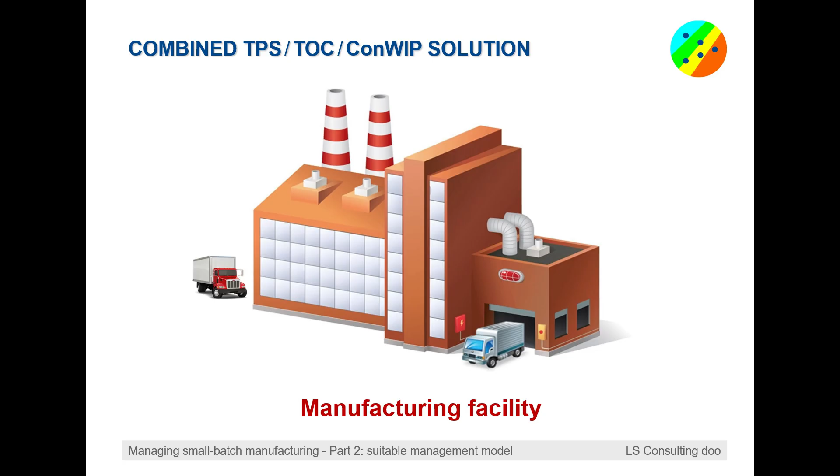Summarizing the previous video presentations in this series on managing small batch manufacturing, let me highlight a couple of the most important points. First of all, production management is not planning, or more precisely, not only planning.

It is a set of interrelated business processes, including organization, planning, dispatching, and performance monitoring, assuming reliable feedback and appropriate early warning indicators. As for the organization, the logistic structure of the system is not given to us from above.

We create it ourselves. It can be an A-type plant or V-type plant, or some other simpler or more complicated logistics. And if someone claims that his management tools do not depend on the system's structure, or that the main problem is to develop the best production schedule but everything else is not his business, then this should rather be considered bad news.

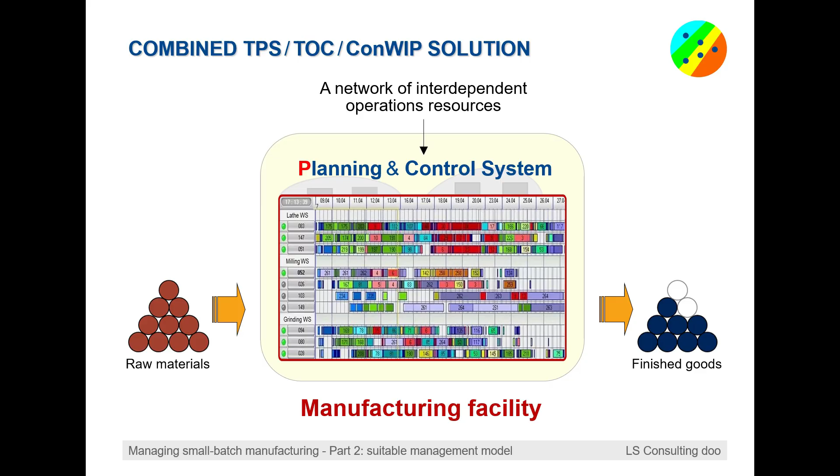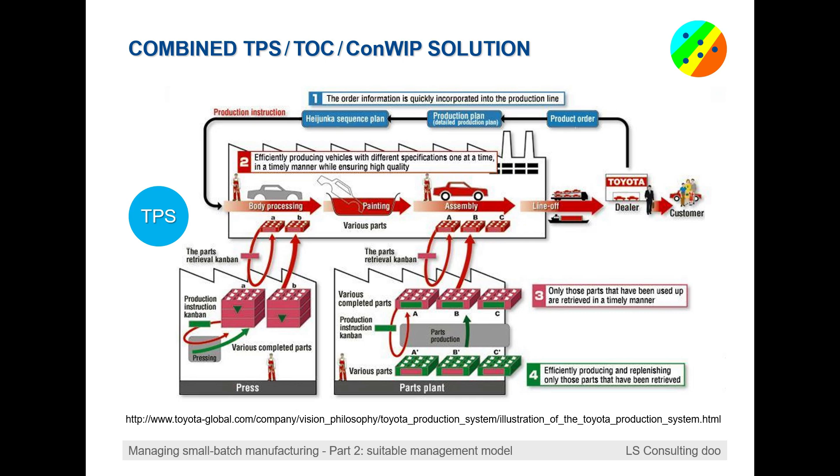The second point is that production planning does not necessarily mean operations detailed scheduling. For instance, there is no such planning in the Toyota production system. In particular, they don't set up in advance the start and completion dates for each individual operation. To distinguish the TPS planning mode, I will call this sequencing instead of scheduling.

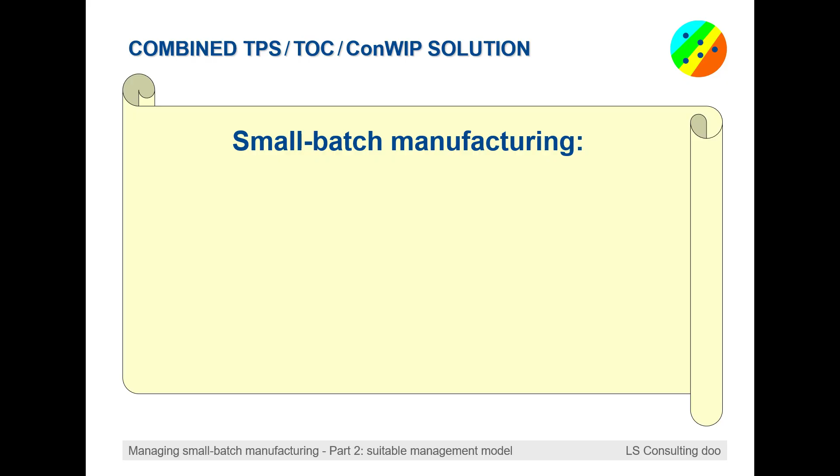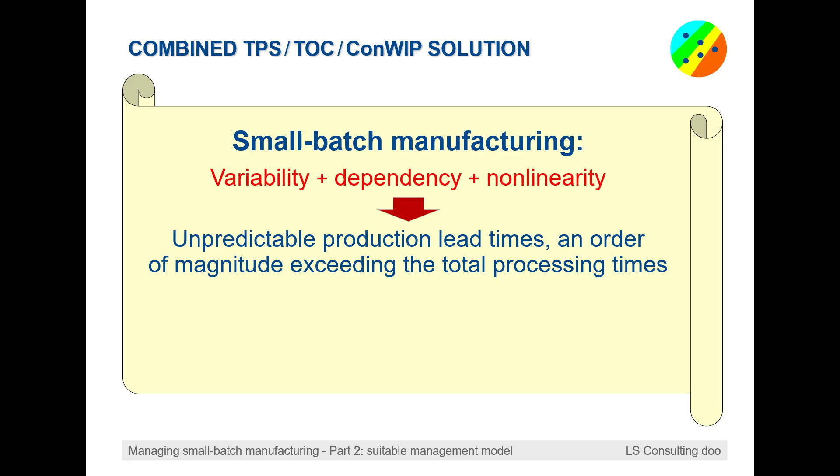The third point is that in small batch manufacturing, due to its characteristic high variability, strong dependency, and non-linearity, the execution times become unpredictable, an order of magnitude exceeding the corresponding total processing times. Therefore, a Taylor-type management model based on operations detailed scheduling is not applicable, not to mention the suboptimality and structural instability of the resulting mathematical solutions.

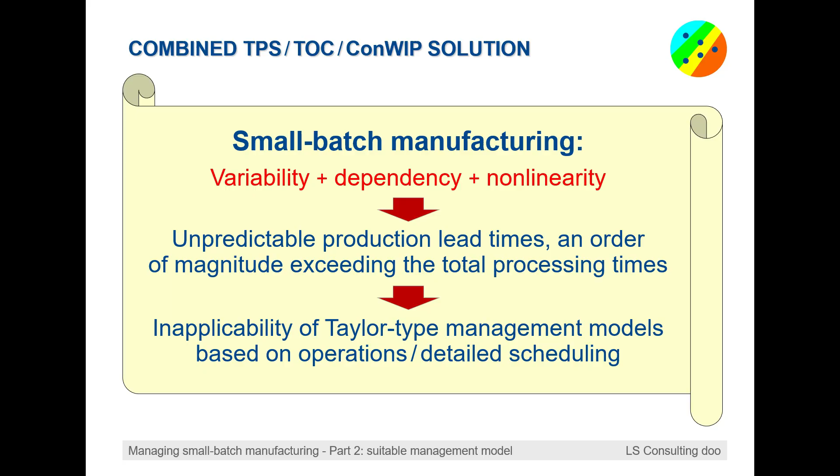On the other hand, in order for any system to be manageable, the following necessary conditions must be met: a single command post providing coordinated control actions, and the magnitude of the control actions themselves must exceed the internal noise level. If, for example, variations in production lead times are measured in days, planning in hours doesn't make sense then.

An explicit stabilization mechanism should be implemented. Otherwise, you will never know whether the change in the production state is due to your control actions or just because of the system's instability.

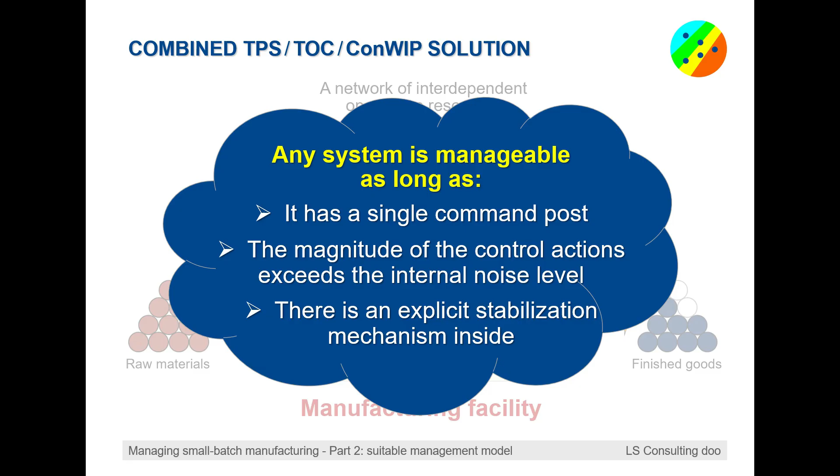Finally, it was proposed to develop a new management model, an alternative to the Taylor-type one, suitable for a small batch operating environment, and based on appropriately modified key logistics components of the Toyota production system. Within this Toyota-type management model, operations detailed scheduling should be replaced by sequence planning, taking uncertainty buffering into account.

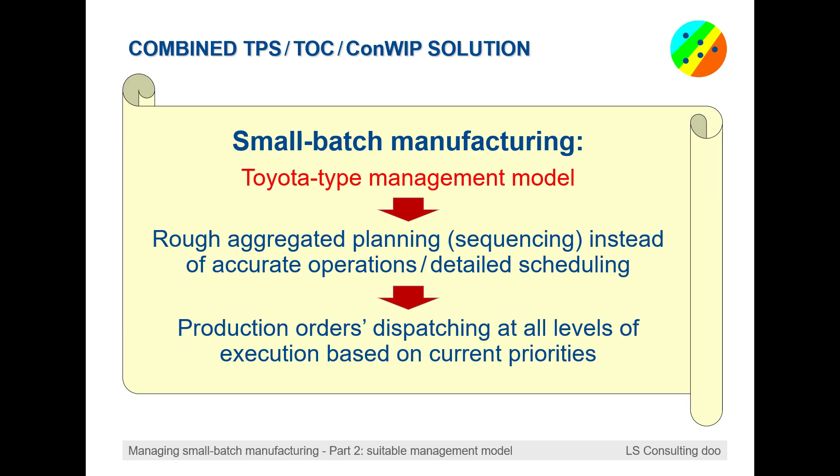And the emphasis in execution should be shifted from trying to follow preliminary created detailed time schedules to dispatching work in process based on current time-varying priorities. Without going into technical details, I will briefly describe now how these 5 key TPS components can be adapted for small batch manufacturing with an A-type or similar logistics structure.

As for the pacemaker process, the situation looks pretty simple. In Toyota, this is the main or assembly line, where the last processing step is performed. Obviously, if you need a single command post to control all production, the best choice would definitely be the step through which all material flows pass.

Therefore, the appointment of an assembly as a pacemaker process will be quite reasonable for any A-type plant, where the parts manufacturing and assembly production units are separated by a kitting point. Note that in the theory of constraints, such an element is sometimes referred to as a strategic constraint of the entire system.

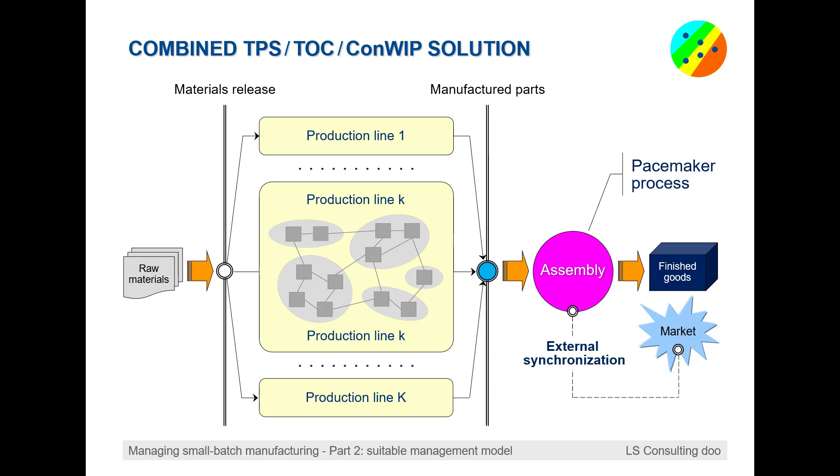This approach should ensure, on the one hand, the consistency of the master production schedule with the sales or finished goods shipment plan, the so-called external synchronization, and on the other hand, smoothing out the manifestations of the bullwhip effect and overloading of the capacity-constrained resources in the assembly feeding channels, the so-called internal synchronization.

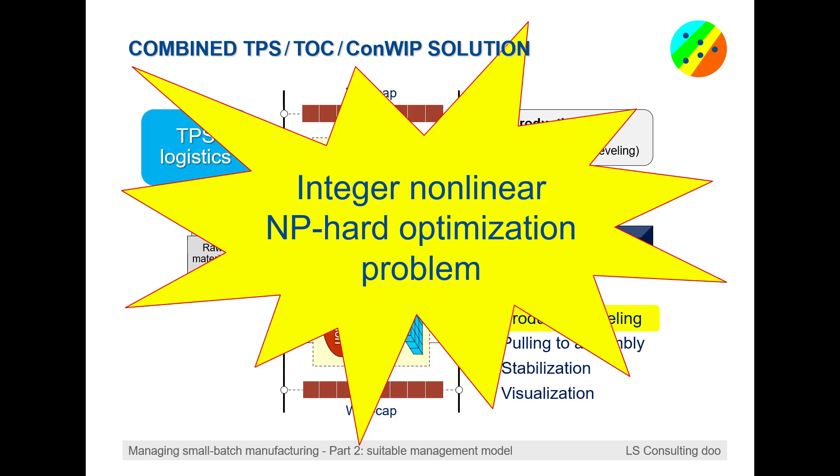To this end, for the mixed model cases, the only detailed instruction sheet is developed in Toyota on a daily basis, in the form of a sequence of car models introduced into the main line, the so-called Heijunka sequence and leveling plan, calculated in accordance with a quite sophisticated algorithm, as mentioned in one of the previous video presentations of this series. An integer, nonlinear NP-hard optimization problem is solved in Toyota for this purpose.

Whereas the corresponding technique that is believed to be the TPS cornerstone is proprietary and is considered a black box. In our situation, depending on the logistic structure of the system, as well as the completeness and reliability of the initial data, similar approaches can be used to level production.

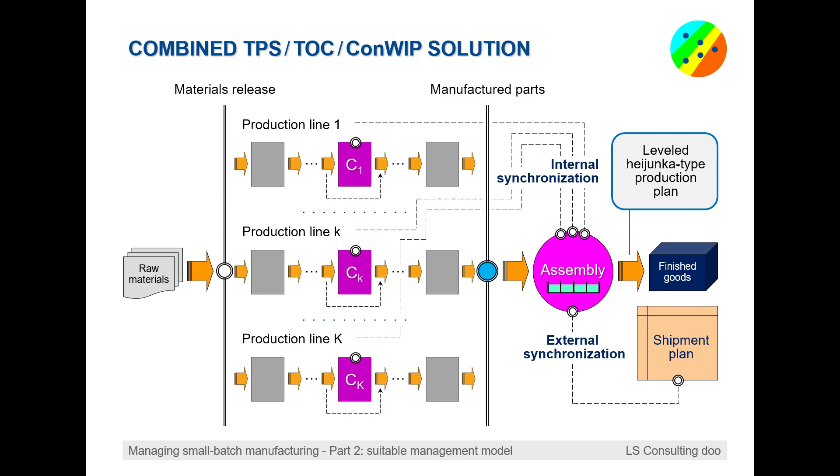In general, this requires additional built-in buffer protection in each of the feeding channels. But in some particular cases, due to the specially developed flow synchronization tools, it is quite possible to significantly reduce the size of such buffers, and consequently the production lead time.

For example, in this simple but real case with 4 end products and a given shipment plan, Heijunka type leveling can be performed according to the shown master production schedule, obtained by determining some mixture of items to be manufactured in each of the 12 sequential time intervals.

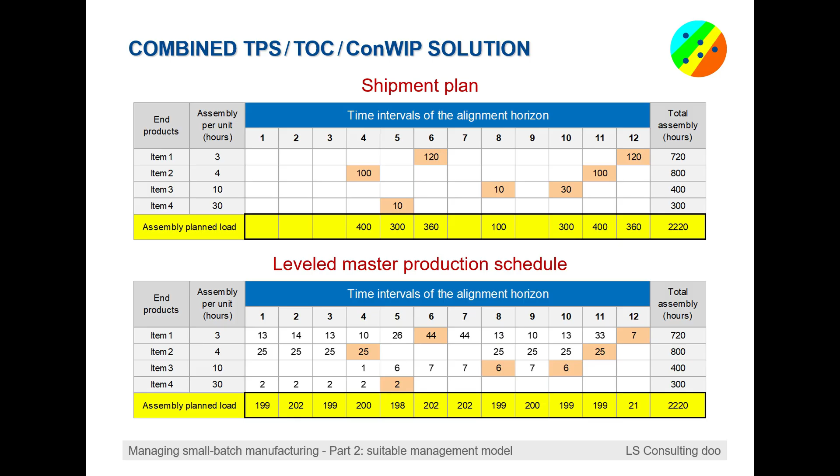Unlike Toyota, where only one assembly unit is released during takt time, a mixed aggregated plan is formed for small batch production. As for the pulling technique, the priorities of replenishing the mainline posts with the necessary components in Toyota are determined by the dynamics of their actual more or less even consumption.

Production lead times are usually short, and the first-come, first-served policy is quite effective. So the classic Kanban is perfect for such a production environment.

In small batch manufacturing, however, consumption rates can vary significantly over time, even if you produce some parts to stock. Therefore, it would be wise to be able to change the release and processing sequences accordingly.

An appropriate technique developed within the theory of constraints, called MTA, was briefly described in the previous video presentation of this series. It is very similar to Kanban, but is more flexible in a highly uncertain operating environment. In particular, the priority of each formed replenishment production order changes dynamically in time depending on the current manufacturing state.

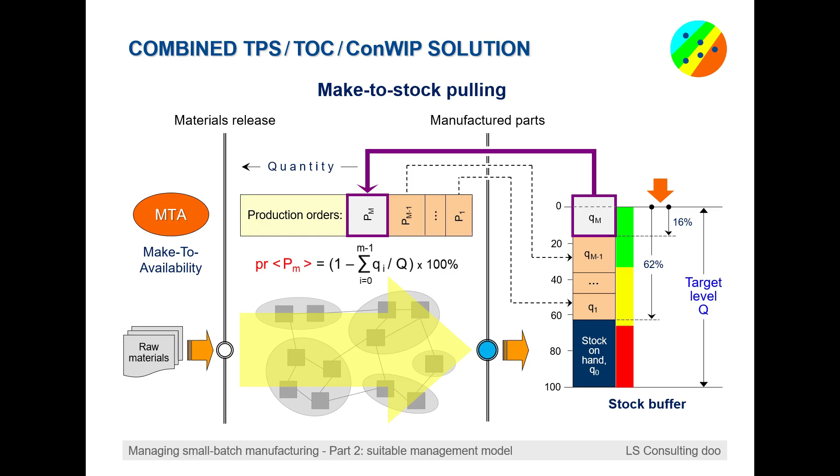Another important feature of small batch operating environment is the wide range of products, where many, if not all, finished goods are made according to customer orders. This usually means shipping as well as manufacturing the relevant parts and components to specified due dates and in certain quantities.

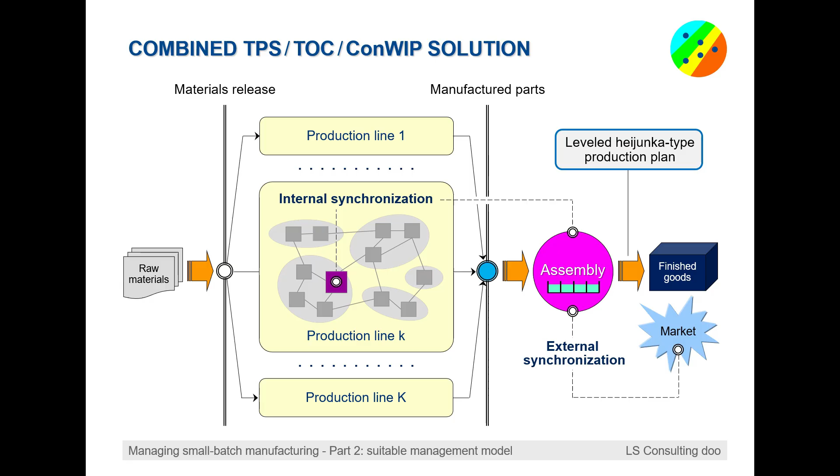The general idea of the corresponding SDBR logistics solution, developed within the theory of constraints, was also briefly described in the previous video presentation of this series.

To explain this mechanism in more detail, let's assume that 3 different parts need to be manufactured by some assembly start date, instead of senseless manipulations with the standard operation times.

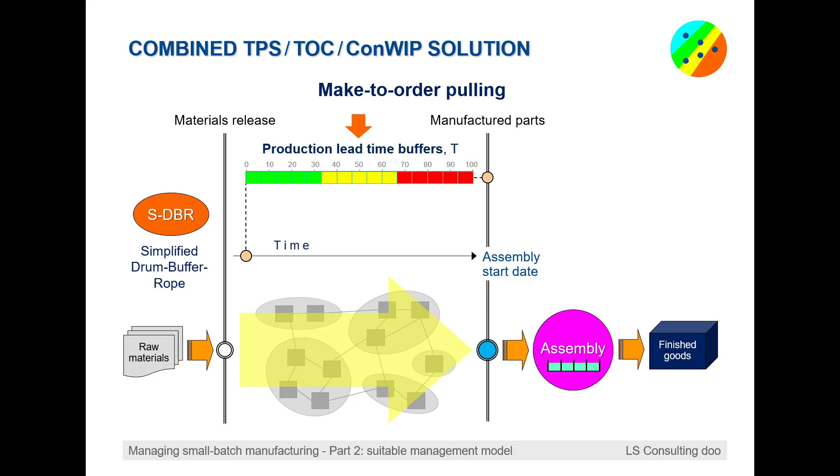A so-called production lead time buffer is introduced for each part, that is, a time interval sufficient for this part to pass through all manufacturing steps with a stably loaded system. As a result of such rough planning, preliminary start dates for the execution of the relevant production orders are determined.

And as part of this solution, the priority of each production order at any given time is calculated as the degree of penetration into the corresponding time buffer.

For example, in the diagram shown at the current date, the priority of the third production order is 50%, yellow zone. The second is 67%, on the border of the yellow and red zones, and the first is 80%, red zone.

Some may claim that it is very difficult to set time buffers for hundreds and thousands of parts, subassemblies, and assembly units in production.

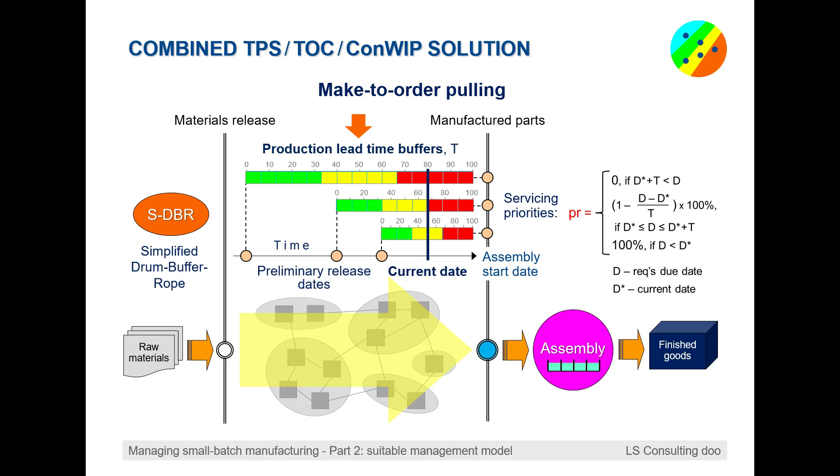I note once again that in the variations world we are not talking about precise numbers, and if the actual variability is measured in days, there is no point in planning anything in hours, let alone minutes. In addition, there are fairly simple practical approaches for assigning time buffers. Anyway, the stability of the production system is much more important.

As is well known from factory physics fundamentals, a prerequisite for the stable operation of any production system is that releases are regulated in a manner preventing work in process from growing beyond a specified limit, or WIP cap.

In TPS, this is done in the simplest way by fixing the number of Kanbans at each processing step. In our situation, when Kanban is not applied, the necessary explicit mechanism can control the work in process level in each production line, or in groups of lines, or in the entire system at once.

In such a case, thanks to the principle of an optimal operating mode existence, briefly described in one of the previous video presentations of this series, it becomes possible to fully control manufacturing and to make the system really pull.

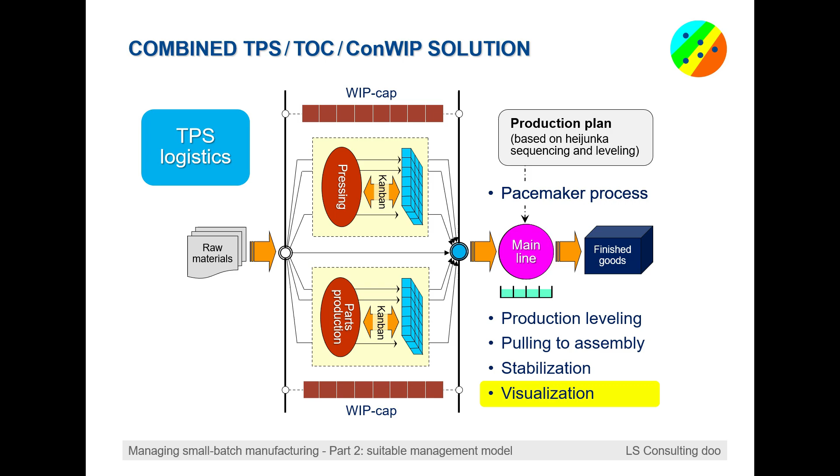The last but not least TPS key component is visualization. In this regard, in Toyota they usually talk about Kanban cards, Heijunka boxes, and all kinds of shop floor dashboards.

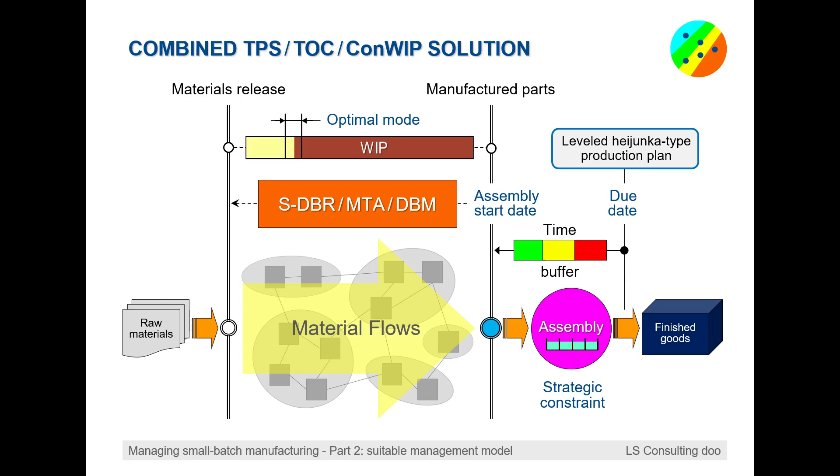Meanwhile, in a high uncertainty operating environment, typical for small batch manufacturing, such a function is of particular importance, especially when the emphasis shifts from detailed planning to dispatching. We badly need a special tool that allows us to identify troubles foreseen in the future, sort of the terrain awareness and warning system in modern aviation.

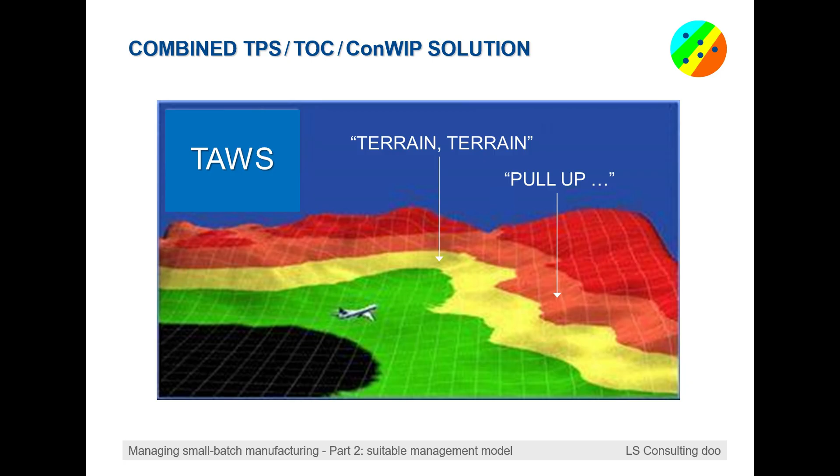Within the framework of the proposed management model and the corresponding information model, which will be briefly described in the third part of this series of video presentations, the so-called production state diagram may be a suitable option.

The fact is that with our approach, every production order, whether make to stock or to order, at any given time has two major attributes, priority and readiness, which dynamically change from 0 to 100% each.

And we believe that the task is performed normally if its readiness approximately corresponds to its priority. In other words, if the point on the plane is located close to the diagonal.

So if dozens, hundreds, or even thousands of tasks are in production at the same time, it becomes easy to understand what should be paid special attention to and what does not require management intervention.

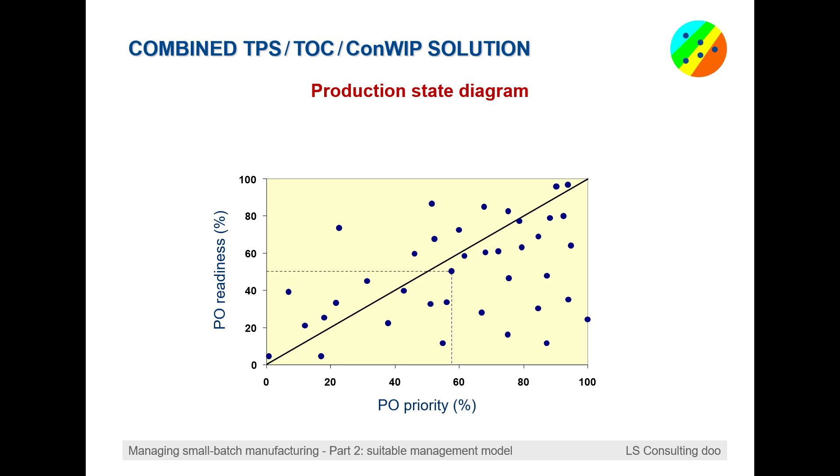In particular, the field near the diagonal is supposed to be the normal operation area. Tasks falling into a high-risk zone with high priority and low readiness require special attention and perhaps some urgent managerial decisions. So do those tasks with low priority and high readiness.

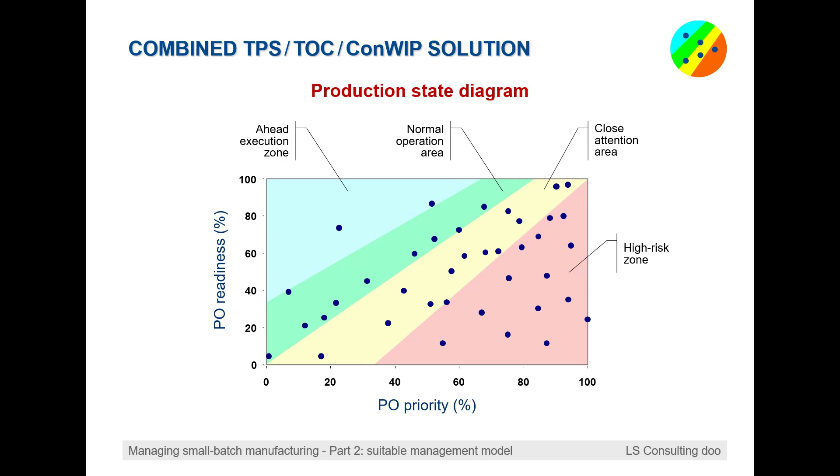For the convenience of visual analysis, two additional sectors can be introduced: close attention area and ahead execution zone, along with an appropriate coloring. The resultant picture may look like this, which makes it possible to observe the whole manufacturing at one glance.